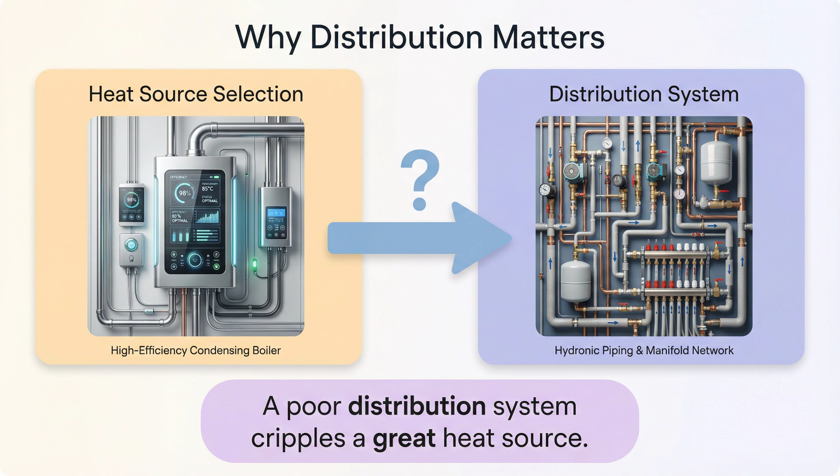Let's start with zoning. A zone is just any area controlled by a single thermostat. Multi-zone systems are great because they let us control comfort room by room and save energy in unoccupied spaces. But, and this is important, don't just add zones for the sake of it. Too many zones can actually cause problems, like boiler short cycling and unnecessary complexity.

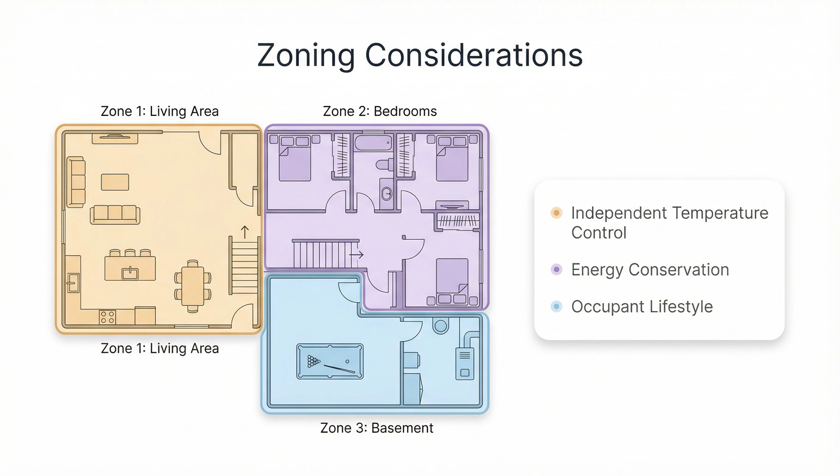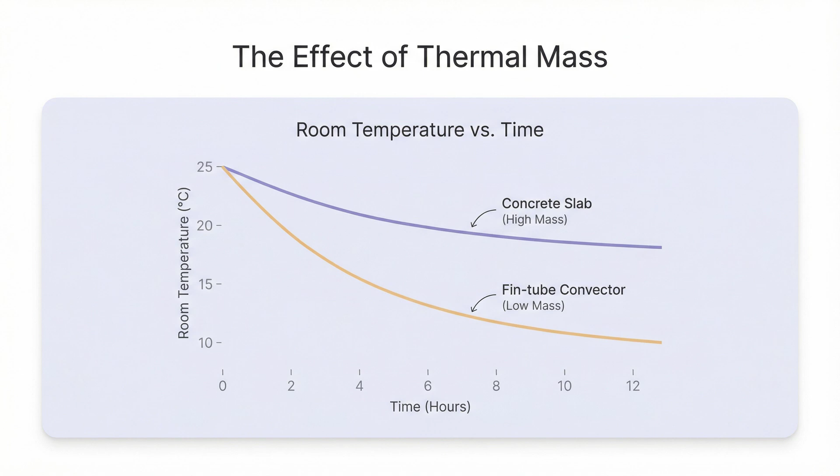Here's a concept that trips people up: thermal mass. Clients often think if they turn the thermostat down, the room cools instantly. It doesn't. If you have a high mass system, like a heated concrete slab, it takes hours to cool down and hours to warm back up. You can't just bounce the temperature up and down on a daily schedule with high mass.

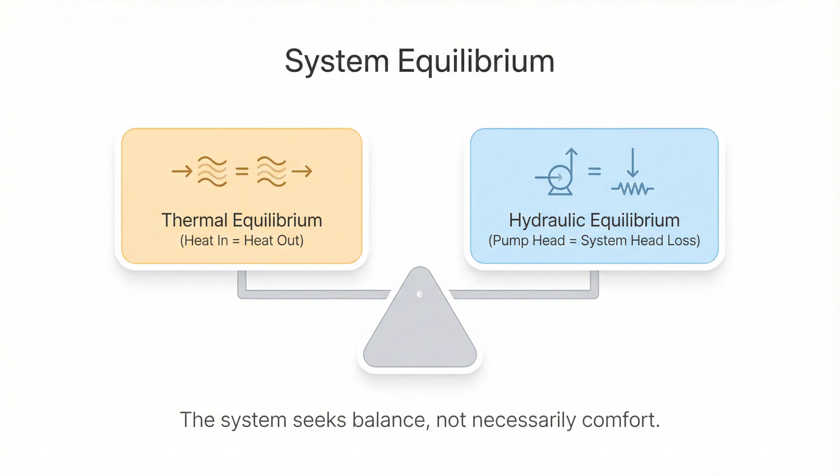It's futile. Every hydronic system seeks two states: thermal equilibrium and hydraulic equilibrium. Basically, the system naturally finds a point where energy in equals energy out, and pump pressure matches pipe resistance. But here's the kicker: the system doesn't care if you're cold, it just wants to balance. Our job is to design it so that equilibrium happens at a point where you are actually comfortable.

Designing these systems isn't a straight line, it's a loop. We call it iterative design. You make an initial guess on pipe sizes and pumps, run the math, see if it works, and then usually you have to go back and tweak it. Maybe you need a bigger pipe here or a smaller pump there. You repeat this until the numbers look right.

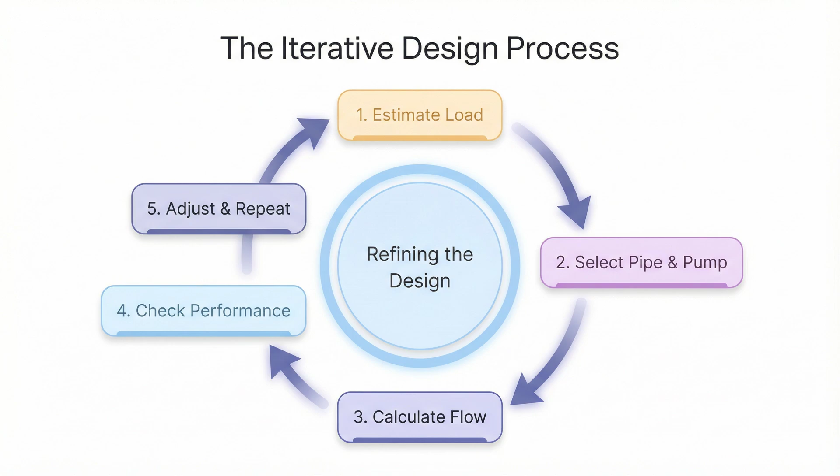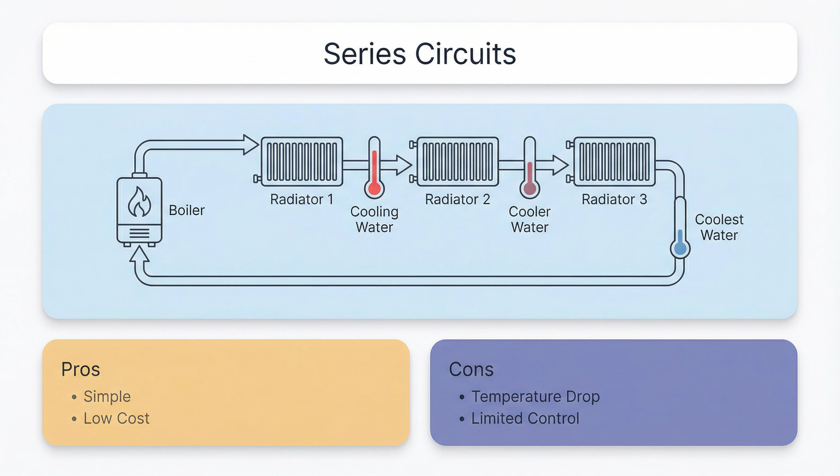Let's look at this simplest layout, the single series circuit. One pipe looped through every radiator. It's cheap and easy, but there's a catch: the water gets cooler as it passes through each radiator, so the last room in the loop gets cooler water than the first. You have to size the radiators differently to handle that temperature drop.

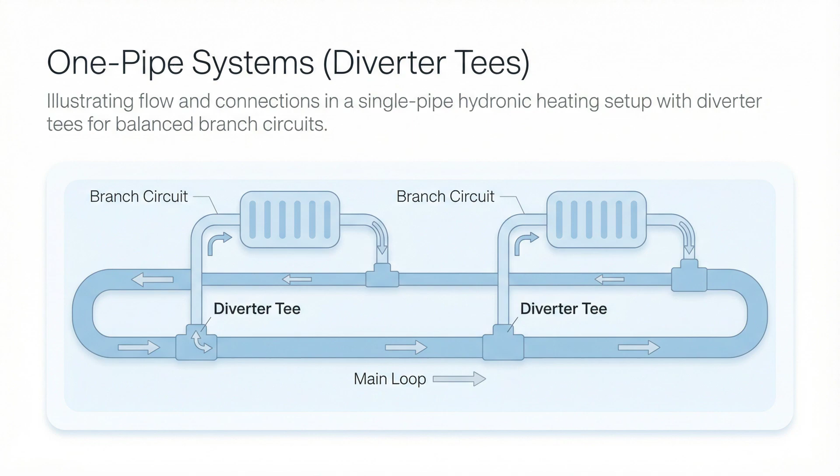To get a bit more control, we use one-pipe systems with diverter tees. These tees scoop a little water out of the main loop, send it to a radiator, and then put it back. This lets us control individual radiators without stopping the whole flow. It's a clever way to get some zoning without running separate pipes all the way back to the boiler.

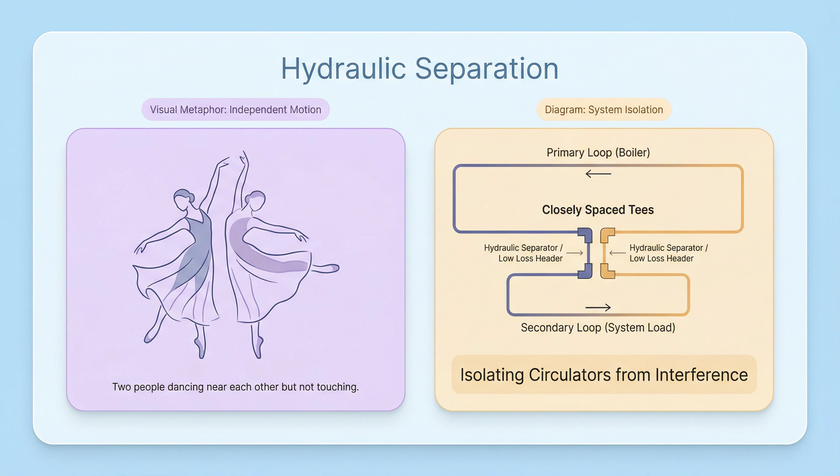This is probably the most critical concept for modern systems: hydraulic separation. When you have multiple pumps in a system, they tend to fight each other. One pump turning on can mess up the flow for another. Hydraulic separation, using things like closely spaced tees or a hydraulic separator, makes sure each pump operates independently. It's like magic for system stability.

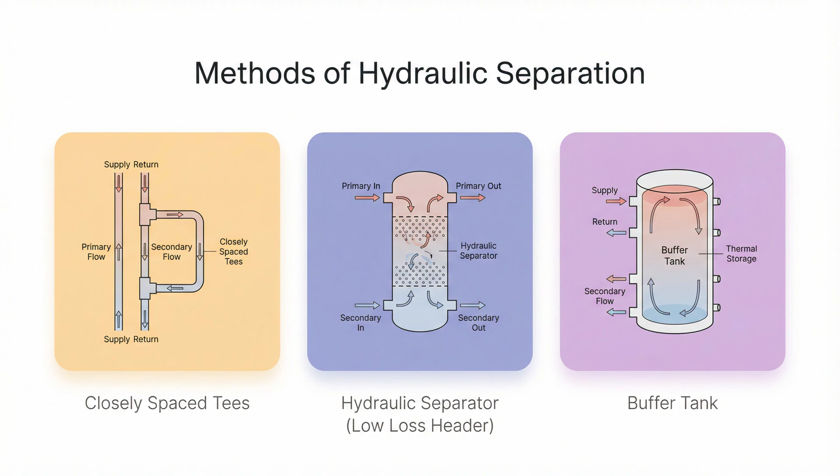So, how do we achieve this separation? The classic way is closely spaced tees, literally two tees right next to each other. But recently, we're seeing more hydraulic separators. These are vertical canisters that not only separate the flows, but also remove air and dirt. They're incredibly useful, especially when connecting new boilers to old piping.

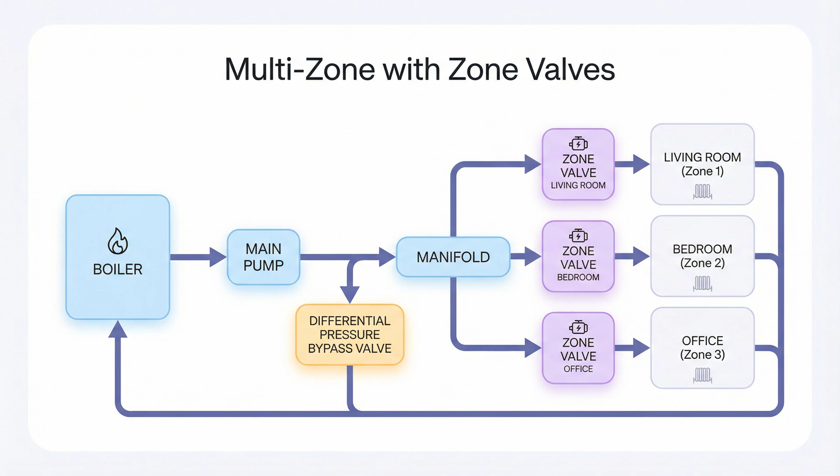Another common way to zone is using valves. You have one big pump and little motorized valves that open or close for each zone. But wait, if only one zone is open, that big pump is pushing way too hard against closed valves. That's why we often need a differential pressure bypass valve, or better yet, a smart variable speed pump that slows down automatically.

Now let's talk parallel piping. In a direct return system, the water takes the shortest path to the first radiator and comes straight back. The problem? Water is lazy. It wants to go through that first short loop and ignore the radiators at the end of the hall. You have to use balancing valves to force the water to go the distance.

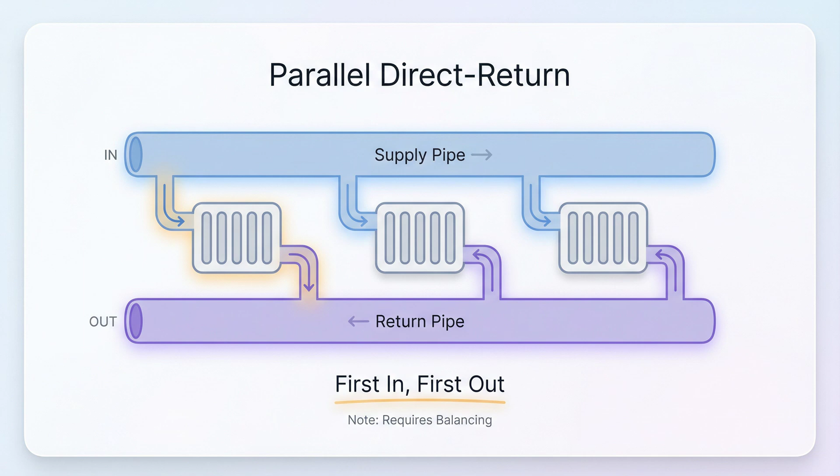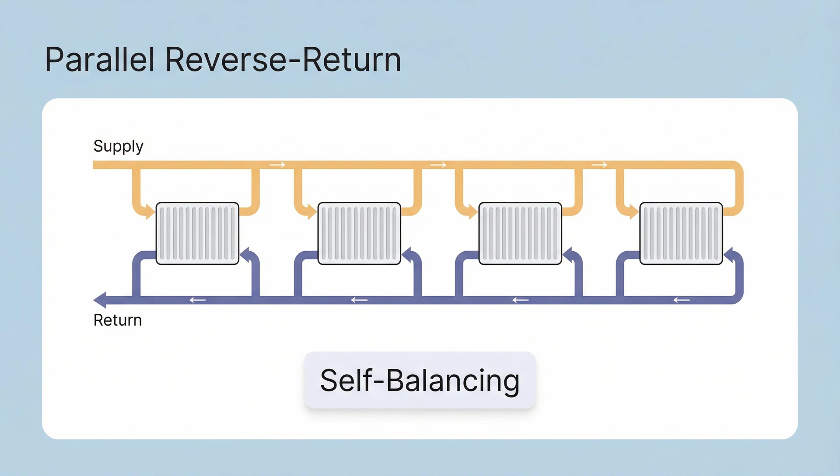To fix that lazy water problem, we use reverse return. Here, the first radiator supplied is the last one to return. This means the total pipe length to every single radiator is about the same. It naturally balances the flow, so you don't have to fiddle with valves as much. It uses a bit more pipe, but it works beautifully.

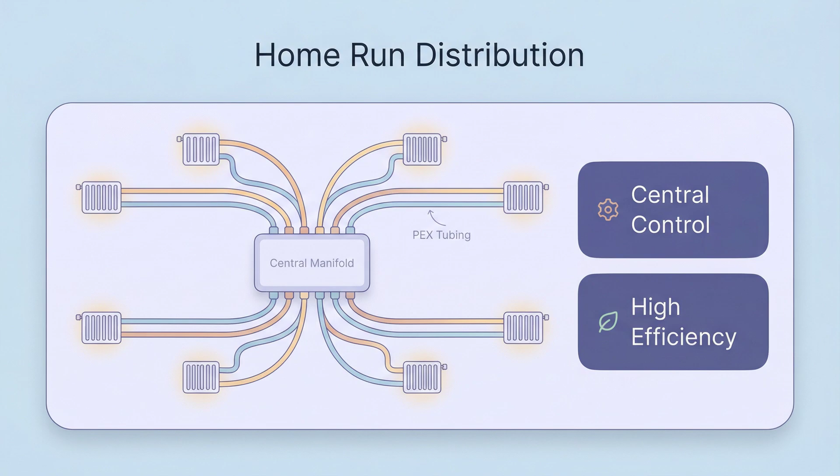This one is gaining a lot of popularity: the home run system. Think of it like an electrical breaker box. You have a central manifold, and a dedicated flexible PEX tube runs to every single radiator. It's fast to install, easy to zone, and actually uses less pump power than you might think. It's perfect for modern construction.

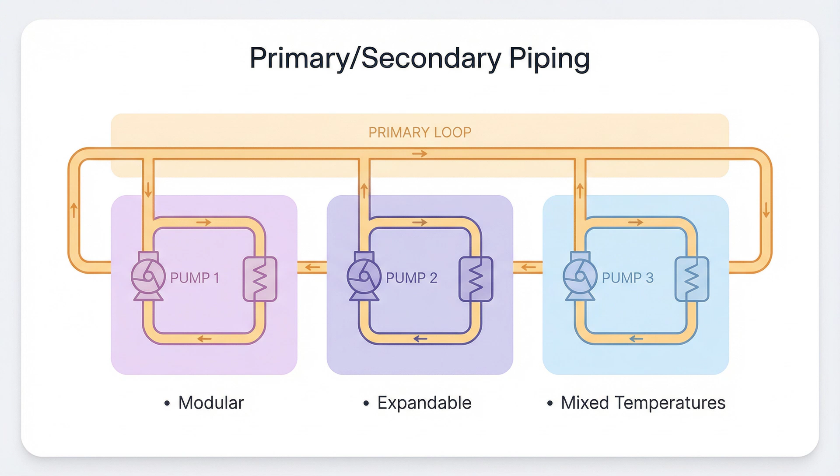We mentioned hydraulic separation earlier. Primary-secondary piping is the granddaddy of that concept. You have a main loop circulating water, and secondary loops tapping into it for specific zones. This is how we handle complex systems, like having high-temp radiators and low-temp floor heating in the same house. Each loop does its own thing.

We always talk about boiler efficiency, but what about distribution efficiency? How much electricity does it cost to move that heat? Hydronics shines here. A good hydronic system can move nearly 6 times more thermal energy per watt of electricity than a forced air system. It's a huge operational advantage that often gets overlooked.

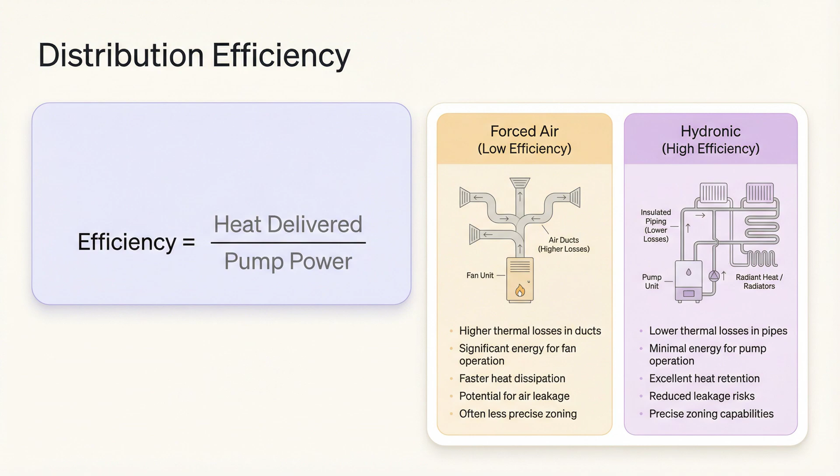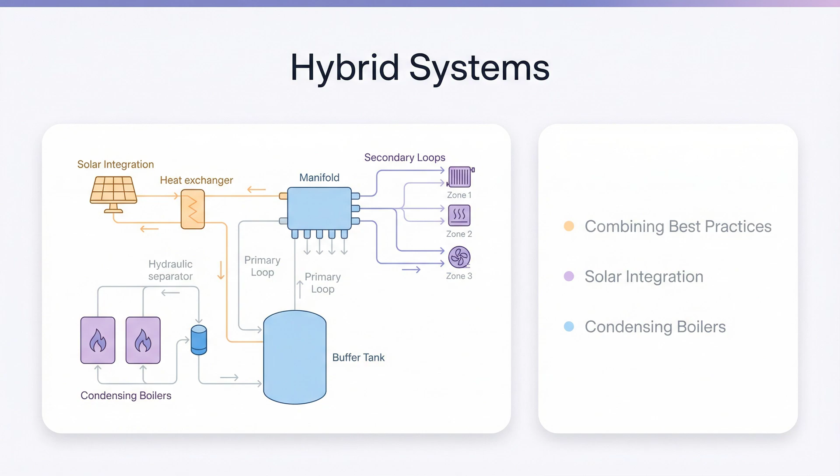And then you have the monsters, hybrid systems. This is where we take a little bit of everything, manifolds, PS piping, buffer tanks, and mash them together. It looks complicated, but if you break it down by function, it's just a series of simple concepts working together to handle things like solar input or multiple boiler stages.

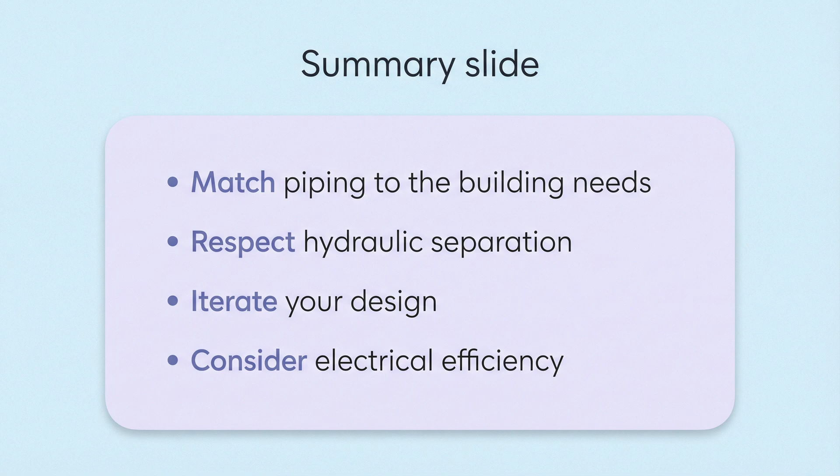So to wrap up, there is no single best piping system. It depends on the building. But whether you use series, home run, or primary-secondary, the rules of physics don't change. Respect hydraulic separation, balance your flows, and keep an eye on how much power your pumps are using. Do that, and you'll have a system that lasts.